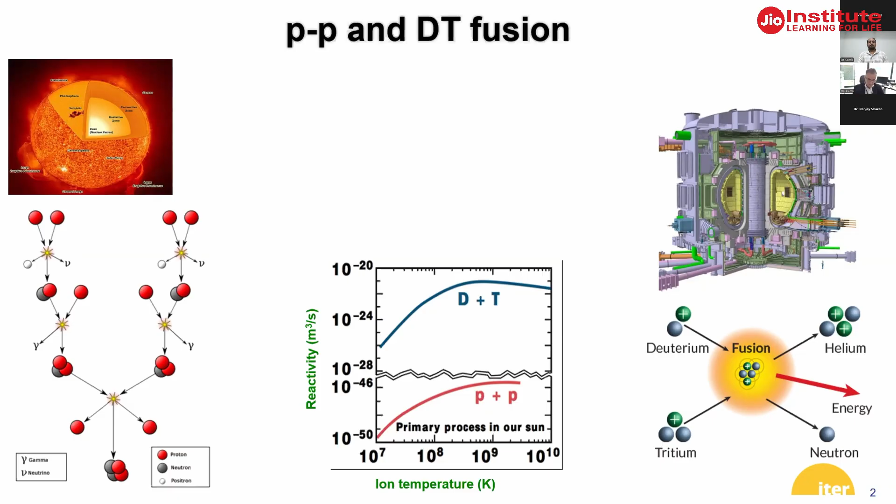So we use deuterium and tritium, which has a reactivity many orders of magnitude greater than proton-proton fusion. So we can have power densities which are significantly larger.

I wanted to share with you the power density question. The power density of, for example, a light water reactor fuel element is about 1 gigawatt per cubic meter. That's the order of magnitude. Of course, it's so small.

We can have small power sources with the coolant just a few millimeters away from the core of the power source. We have, say, megawatt per cubic meter in a normal burning curve, for example, and we'll have about the same order of magnitude in terms of power density in ITER. Now, megawatt per cubic meter is something we can manage.

But what is peculiar in fusion, different from what happens for example in a coal power plant, is that we cannot really embed the coolant in a matrix together with the power source. Cannot do that. The temperature conditions are very high, and the amount of mass we deal with is very small. Whichever way, one or the other, doesn't matter - we have to absorb the power at the edge.

Because DT fusion is so neutron rich, we end up having a big technological challenge associated exactly with that, with the neutron power flux. This has made ITER difficult, but it makes fusion difficult in general.

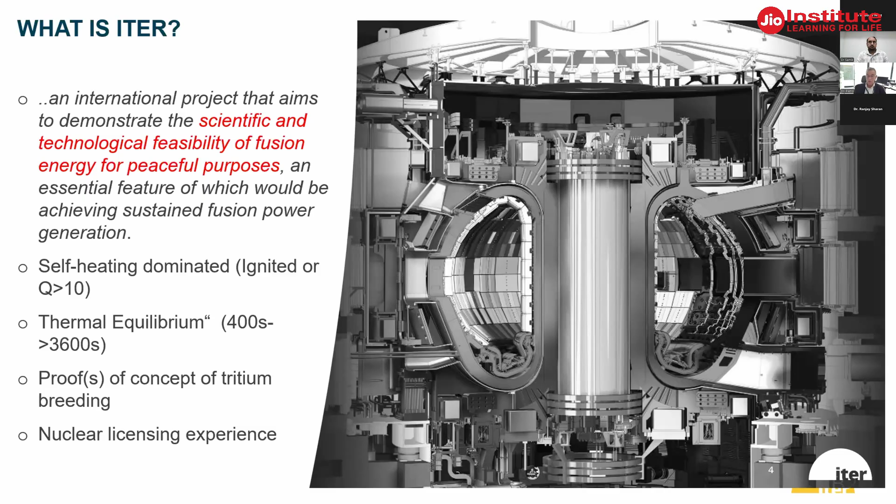ITER should also try to address the question of, at least in proof of concept, tritium breeding. We'll do so through the port plugs. It will provide a lot of know-how, including nuclear licensing experience.

In ITER, we will put about 1 gram of deuterium and tritium, which is more or less the amount of gas normally in the tire of a race bike. We put it in 1,000 cubic meters, so 1,000,000 times the volume, 1,000,000 times the temperature, and in fact the pressure is about the same. It will be about 10 bar in the core of ITER.

To reach that pressure, as you probably have studied in your course, we need very strong magnetic fields. The magnetic pressure we will have in ITER with its magnet is more than one order of magnitude above the kinetic pressure in the core of the plasma. That is really the essence of tokamaks, that this aspect ratio must have a beta of a few percent. So we need a lot of magnetic field in order to confine and stabilize the plasma with even a pressure of about 10 bar.

The project was developed in the 90s and then developed further in the early 2000s. When it came in the early 2000s, this is also when India joined the project, and so glad that you did. I hope that you will stay for the long run, as you are contributing tremendously to this project.

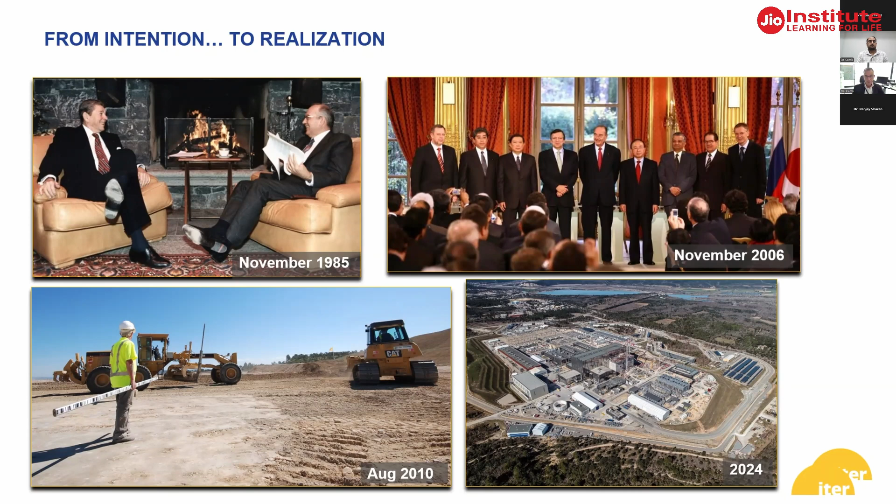This is when the project became more and more a political symbol, not just science research, not only energy research, but also a symbol of cooperation and science diplomacy, which, notwithstanding the fact that it introduces some difficulties, provides a lot of value to the project itself. I am personally quite proud that in ITER we have our 7 flags, and there are not many places in the world where we can show that scientists, engineers and people can work together with the same objective. This is a wonderful thing that I think ITER represents, and I want to recognize the tremendous contributions from India itself, which I'll talk about a little later.

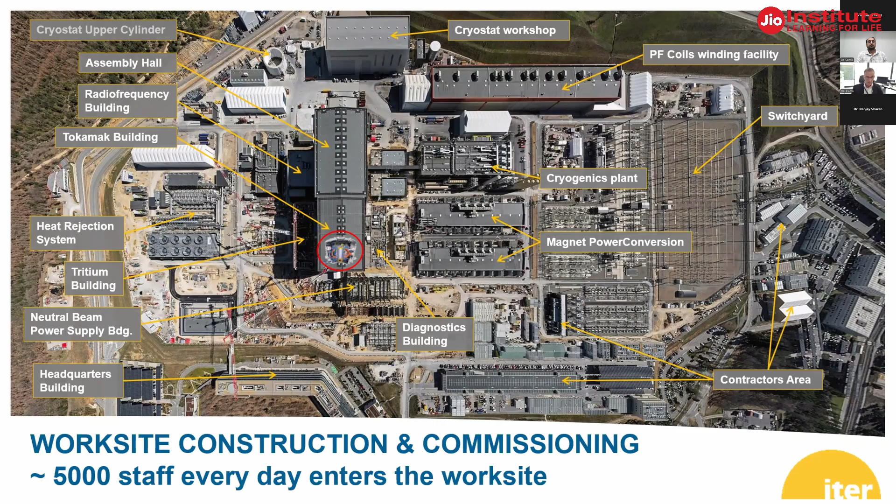If you look at ITER, you would see the aerial view of the project. On the right side, about a kilometer across, there is the switchyard, this is where the power comes in. Unfortunately it doesn't yet come out, but this is where the experiment will draw its energy. We have the cryogenic plant, actually one component where India contributed significantly. We have the magnet power conversion system, and then more towards the left, the tokamak building with assembly hall. Further left, the heat rejection and some buildings for the heating systems. On the lower side, where the headquarters building is, where the orange arrow points, this is exactly where I am at this very point in time.

In ITER, we have 18 toroidal field coils. The entire toroidal field magnet system will have an energy of about 41 gigajoules. Just for comparison, the Large Hadron Collider's entire magnetic energy is about 10 gigajoules, so it is an impressive amount of energy that the ITER magnet will have. It will operate at a field of about 11.8 Tesla at the conductor.

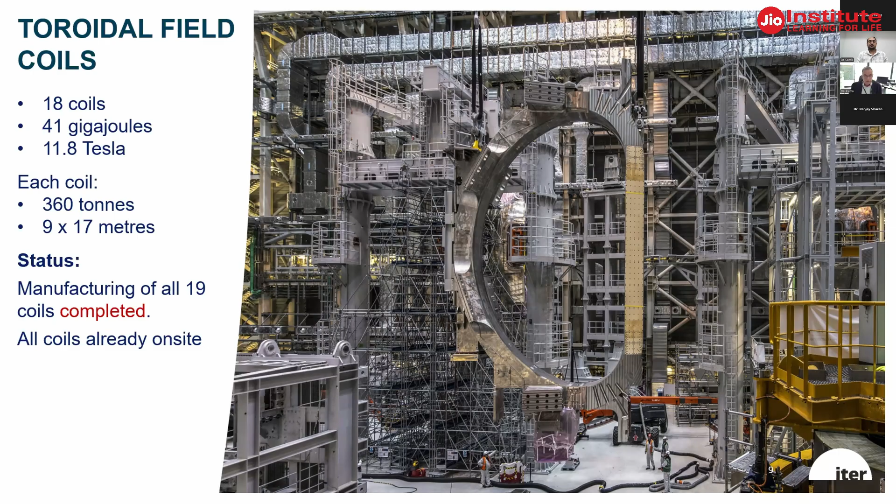It is really so. We have on site now all of the 18 coils. We actually have 19, as we have a spare one.

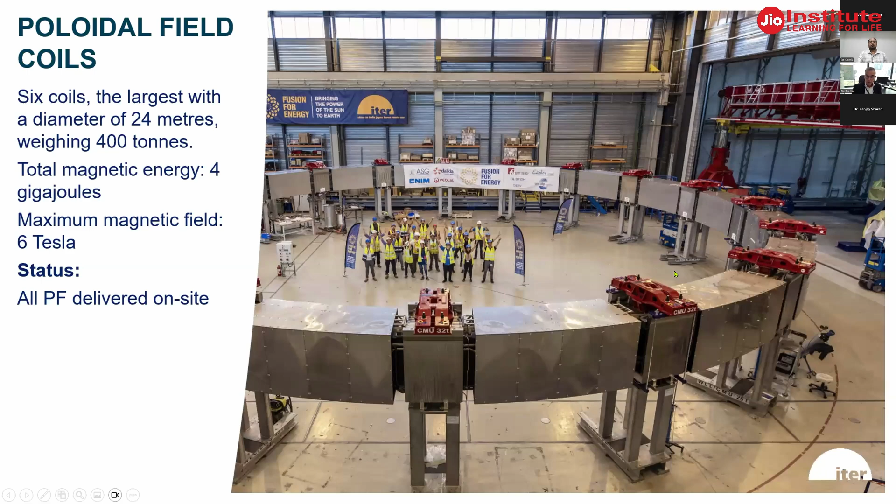Magnetic field here is less. Essentially, coils are made of niobium titanium in this case, while the TF coils operate at a higher field, and they are niobium-3-tin.

Then we have 9 sectors for the vacuum vessel. We got the 7th one here just today, and we have 2 more to go. They are one in Chieti in Italy, one in Westinghouse, also in the northeast of Italy. They are being finalized, and I was there last week just to encourage the team to deliver the vessel sectors.

Because they are essential for the assembly phase. So we have, as I repeat, 9 sectors of the vessel and 18 coils, meaning that each sector is pre-assembled with a thermal shield and the 2 TF coils before being lowered in the pit.

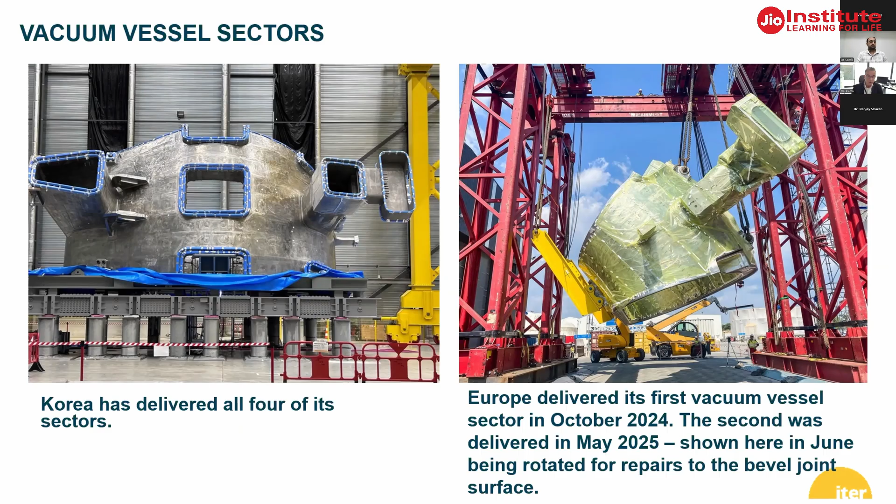Here you have an image in the assembly hall. On the right side, you see a vacuum vessel sector waiting to be put on the assembly frame. The pre-assembly frame is the one you see on the left side. And there you see another vacuum vessel sector.

If you look carefully, you will also see that around the vacuum vessel sector, the TF coils are assembled, with the thermal shield between them. We need the thermal shield between superconducting magnets and hot surfaces to limit the radiated power to 4 Kelvin. Otherwise, it would be impossible to cool and keep cold, and the magnet would be too expensive.

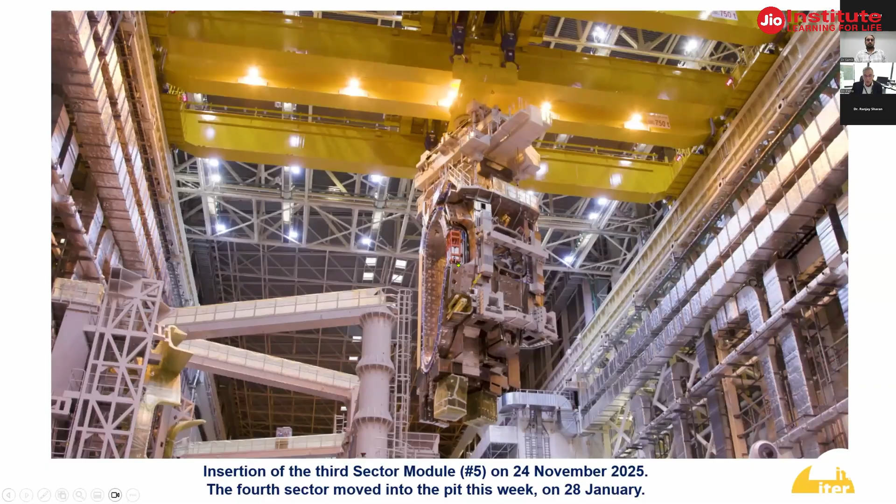I hope now you will be able to see an image here, which is the lift of the sector. It says the fourth sector moved into the pit this week, but in fact that was not this week - sorry, I didn't update this slide. This was the third sector being inserted, and I have a movie of that, which happened on the 24th of November.

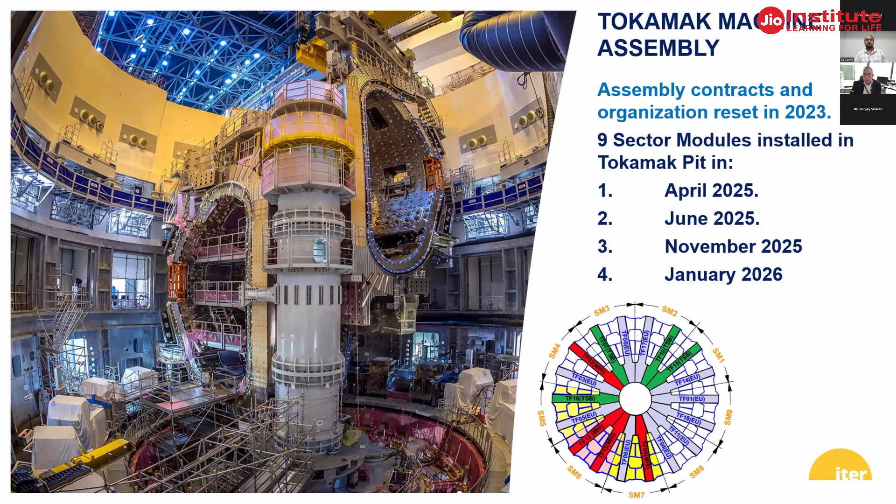On the 28th of January, we put the fourth sector in the pit, and soon we will put the fifth and then the sixth. So we are moving ahead. We have one more sector to be put in soon, but so far we had 4: one in April, one in June, one in November, and one in January. We are now putting sectors in the pit at the rate of about 4 every year.

And it has not always been like that, unfortunately, in ITER. Some of you that have worked in ITER know that there have been times where this was not proceeding as fast as it is now.

We have now, as I show you from the aerial view, a power conversion system. This converts electrical power coming from the grid to slowly modulated DC current to the magnet system. There are also power converters which operate at higher frequency, higher modulation, in order to control plasma position, control some of the coils, control events such as edge localized modes, or control the behavior of other minor types of magnet systems.

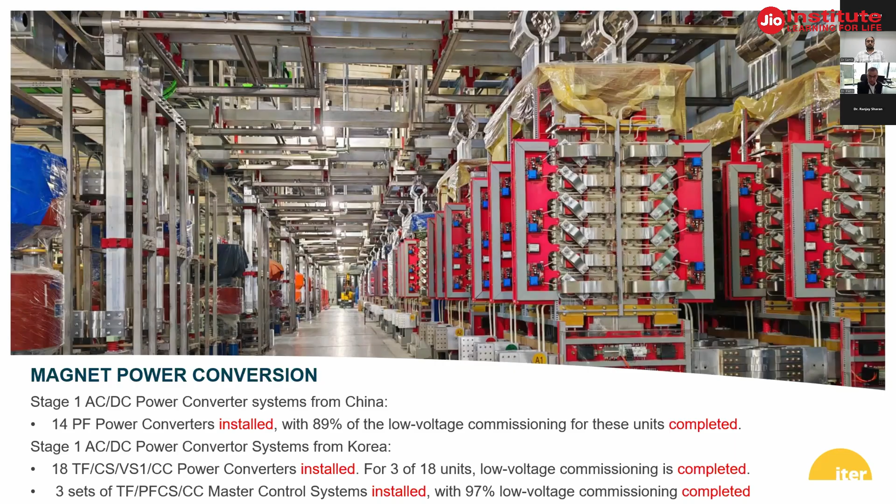On magnet power conversion, we have essentially all the stage 1 power converters installed, with commissioning essentially being completed. We have a very large cryogenic plant that has a refrigeration power of 75 kilowatts at 4.5 Kelvin.

Much of this power is to some extent conducted and radiated. Some of it is because of the AC losses in the conductor itself. There are many sources of heat to the magnet that have to be refrigerated through helium liquefaction.

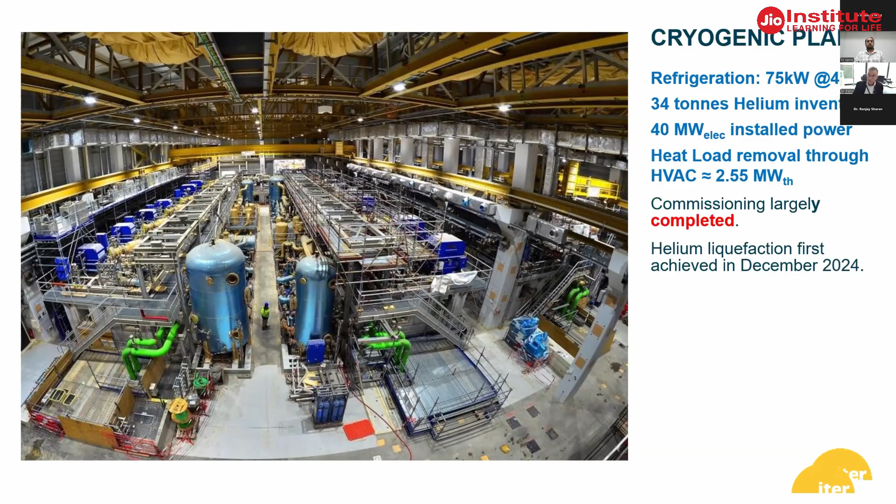The cryo plant and the cryo distribution is largely completed. Cryo distribution is still in the phases of completion, but a lot of work has already been done with a lot of input also from Indian companies. We achieved liquefaction in December of '24, and we are now using this cryo plant for a test facility.

This is the test facility. We decided 3 years ago to build, as a matter of urgency, a magnet test facility, and we have one now.

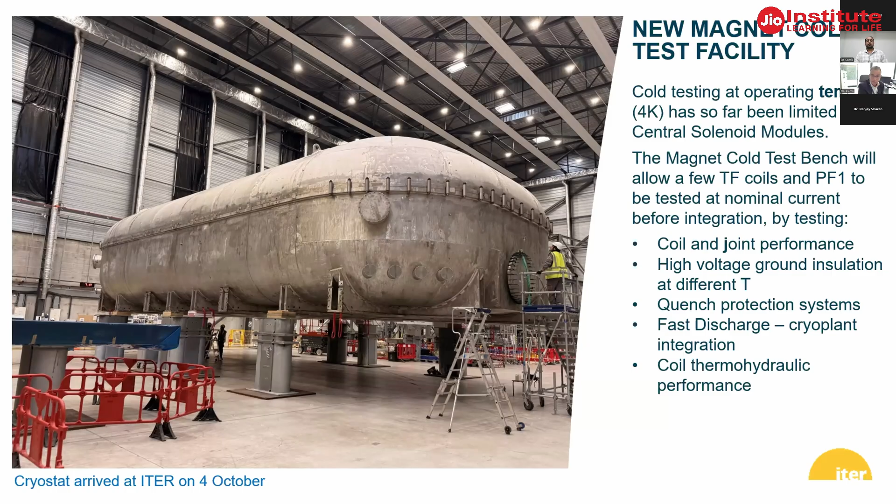We got the cryostat in October, and as I speak now, we have one magnet inside, and we are preparing ourselves for its testing. We will not be able to test all coils, unfortunately, as ideally I would have liked, but as a minimum we will test a few so we can see if there are issues that we can correct. This will provide a lot of know-how for the forthcoming commissioning phase and anticipate some potential issues.

So myself, I was working in the 90s, and I joined back the project three years ago. Maybe some of you could listen to my first talk at the Fusion Energy Conference in London. We had significant issues to deal with at the time, including thermal shield panels to be repaired and vacuum vessel sectors to be repaired.

At that point in time, end of 2022, we had one sector in the pit that took a lot of time to assemble, which we decided to pull out and repair. It was a very difficult moment for the project because we had underlying issues of quality and quality culture, and difficulties with the regulator who did not quite trust our quality control and quality culture.

We also had some assembly contracts that were not going at the speed we wanted. I mentioned that now we are able to pre-assemble and install four sectors per year. At the time, it took almost two years to install one. So it was a little bit too slow, let's put it this way.

We had to repair the components, develop a new baseline, and try to improve the project and design control processes. I'm glad to report that after two years plus of implementation of the new baseline, and all the work initiated in 2023, we have basically restructured massively the organization. I want to recognize that some of today's panelists have been at the core of this restructuring, in particular Arun and Barua, who contributed tremendously with ideas and actions to restructure the ITER project.

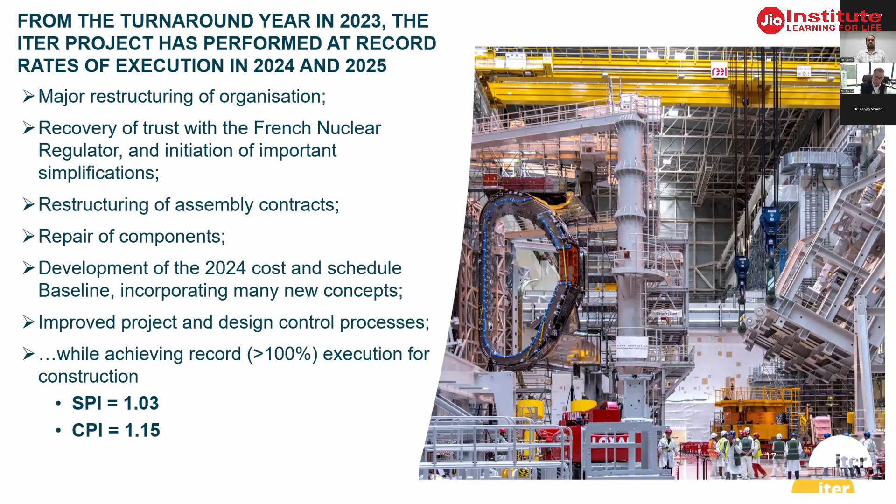But so many people have contributed. We now have, as of March 2025, an integrated schedule performance index for 2024 and 2025 of 1.03 - so more than two years above 1.03. Bear in mind this is almost a factor of two compared with what we had before.

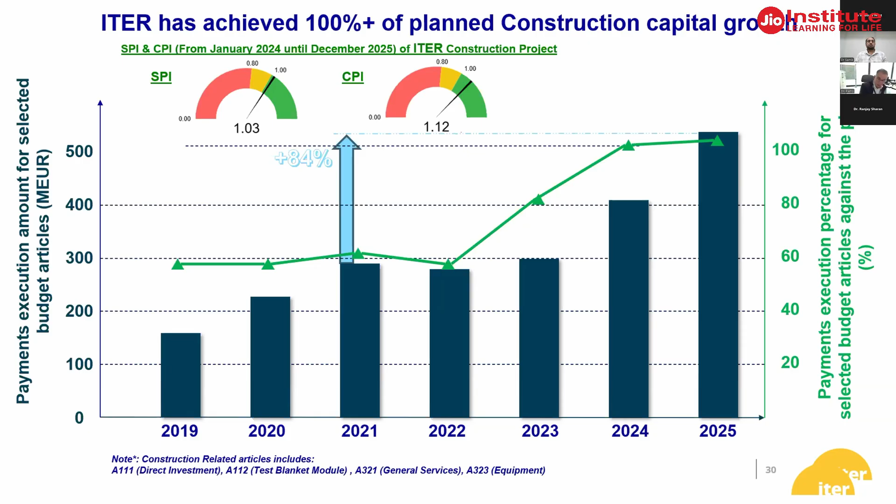This is data about plant construction capital growth. In 2025 we've implemented an SPI in excess of 1. We have implemented not only 100% of the planned work, but also 84% more work than ever before 2022. Actually this plot is conservative, because the cost performance index we have now is significantly higher as well. When it comes to actual earned value rather than payment execution, the difference is more striking. We are trying to prepare accurate information about this data.

Now I decided to give you a bit of perspective in the coming 15, 20 minutes about fusion, because I frequently get questions like 'oh my God, look at ITER, it's so beautiful, but so large, so complicated.' We should be conscious that this is not per se something we should do in the long run, but there are reasons for that.

We need to reach a certain type of performance that requires a certain triple product. In tokamaks, at the end of the day, the triple product is very closely related to the aspect ratio times the plasma current. For our aspect ratio, the plasma current we shall need is about 15 megamperes.

Important again is this question about thermal equilibrium, and also providing sufficient shielding to host a blanket. There have been, in the history of fusion research, some design proposals - I'll pick one here called BPX, designed in Princeton in the late 80s, early 90s. This was a burning plasma experiment designed to reach thermonuclear conditions, but not to have thermal equilibrium of the structure, not to have the shielding blanket, only to focus on a transient thermonuclear plasma ignition.

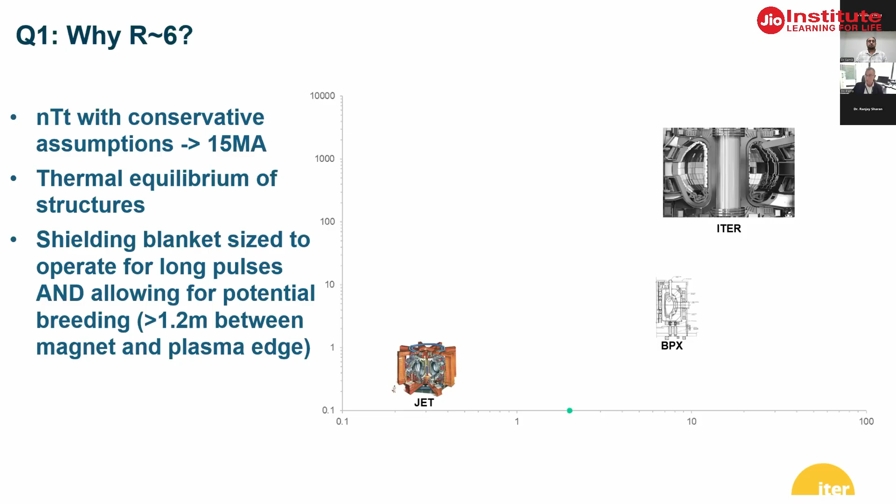Another driver is the size that's needed, the space that's needed potentially, not only to shield the magnet for the neutron flux, but to provide space if one would like at some point to utilize ITER also to demonstrate breeding at scale. This is something which in principle ITER could do at some point in time.

Another question I am asked frequently is: this was designed essentially in the 90s, the R&D was prepared in the 90s. It was, of course, very advanced and highly technological R&D done then. But what about if we would do it now? It has taken so long. Would we do it now? Could we do it faster, smaller, and whatnot? Well, here also I have to put some words of caution.

There are new technologies now that, no question, could facilitate this, and some of them we are actually able to implement in ITER itself. But I don't see any sort of silver bullet that would make fusion substantially cheaper and more compact.

Take into account that in these massive coils you have seen, in the cross-section, only 4% is niobium-3-tin. Only a small fraction of the conductor section you see there is niobium-3-tin. To a large extent, much of the space for the conductor itself is copper stabilizer, needed to hold on and resist a quench, and of course the helium needed to cool it.

But the bulk of the cross section of the TF coil is needed to resist the magnetic pressure. So it's like a pressure vessel. Almost 70% of the cross section in ITER is steel for the TF coils to resist mechanical loads. And the steel operates at a very high stress level at 4 Kelvin. It's very, very hard, and I am not aware of any other material we've developed recently able to operate at an even harder stress level with such thick and large forgings. So we are still, in my opinion, in ITER, at the state-of-the-art level.

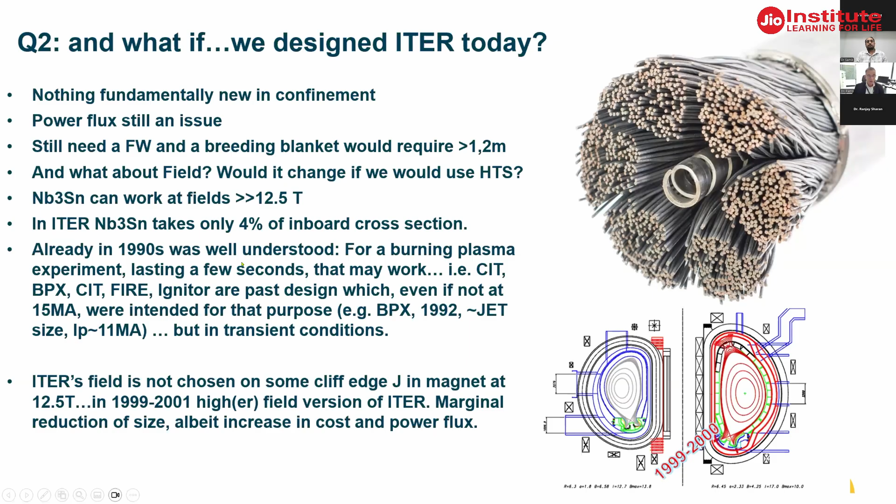I should nevertheless grant that there are important technologies that will be helpful in the future. High temperature superconductor, for example, in my opinion will provide means to reduce the cost. I'm not so sure about the size, but the cost for sure. They can operate at higher temperature, they can significantly reduce the operating cost for the magnet, and they can potentially also be cheaper than niobium-3-tin and the technology associated with that.

So a word of encouragement: ITER remains, notwithstanding the delays of the project, a modern machine. But the question that remains, for those of you who want to entertain a life of research in fusion, is for me more important: it's about the cost. There is no question for me as an engineer that we have to tackle the question of cost very seriously. ITER has been too expensive. It was more expensive than planned, and it has ended up so far too expensive. I have no doubt whatsoever.

Part of this cost, one could say, has something to do with the organizational complexity and some political compromises that have been made. Let's say this was a cost not for the benefit of the research infrastructure itself, but had other benefits, so it was not just wasted money. But we also have to learn about some technical complexity we introduced in this project. Part of it is because it is a research infrastructure, and part of it is that maybe we did not manage requirements very well, and also the fact that many things have been done as a first of a kind.

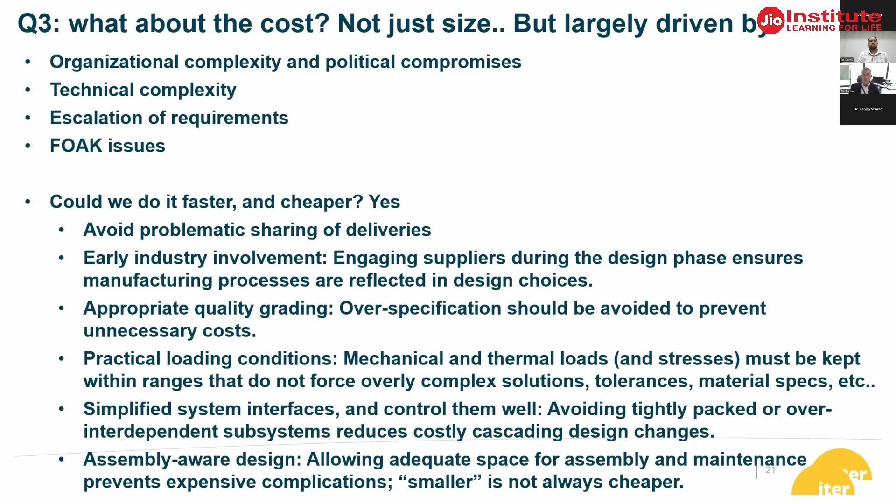I should also spend a few words about dispelling the idea that ITER, when it will operate, will essentially be proving the technology in all its complexities. It's not so. We need to be frank and transparent with our stakeholders and with ourselves, and we have to be grounded to understand what are the fundamental challenges.

I put the cost as the first bullet. I have spoken enough about that, but I think we should always put it as a very important driver. We have to deal with this question about the peaking factor for the heat flux, and research should be devoted to smoothing and spreading the heat flux. There is research in the divertor, research in the plasma mantle, but from my standpoint, notwithstanding many years of attention, this has not yet been fully resolved.

We have an important line of research on materials. We have an important line of research on blanket technology to find ways to breed tritium. As of today, I'm not aware of a design that would be compatible even with the ITER conditions, let alone more compacted designs. It is a complex area of research where many are strongly engaged, and that will have to be sorted out.

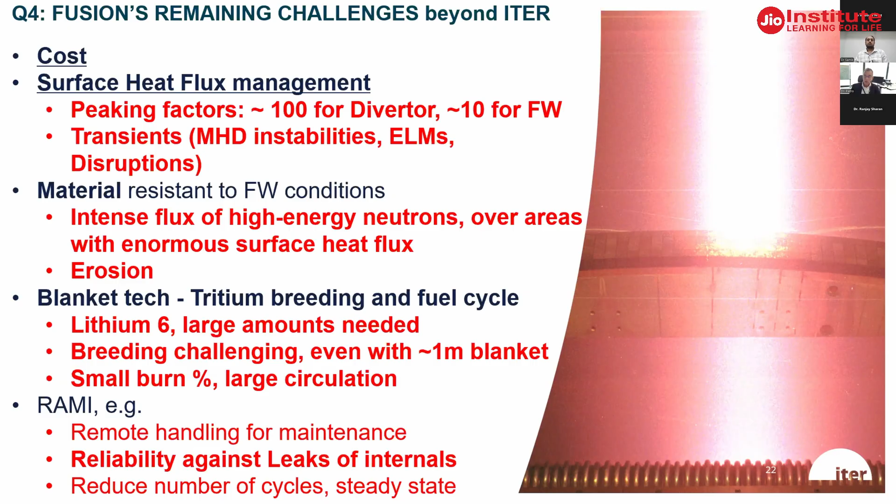And then we have another line which again points to complexity, or better, points in the direction of simplification, which is to find ways to increase reliability. I don't want to discourage anyone. On the contrary, I think we want to make these things work, but it is by being aware of the difficulties that we can then tackle and solve problems.

I want to say that in this process of evolution of the ITER project, we are also trying hard to make ITER more appealing for postgraduates and graduate students, and for those who will finish their master's, like you, and then want to move directly into the work environment.

Our ambition is that, for some time, ITER has been a place where people like me with a lot of experience would come, and we would sort of die here. It's a sort of cemetery of the elephants. It's okay when it comes to experience, but a thriving project needs to mix experienced people with those who come and learn and bring new energy.

For me, it's so important that some of you who may come and work in ITER can later move back to India, to bring back all the knowledge you've acquired working at ITER, back to your nation and to the program that I hope India will develop more and more in the field of nuclear fusion. So speaking about India, what has India done for ITER?

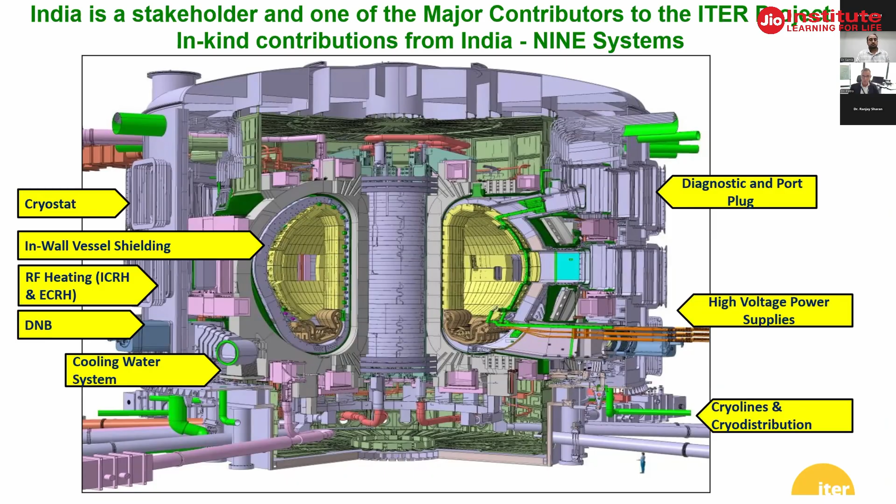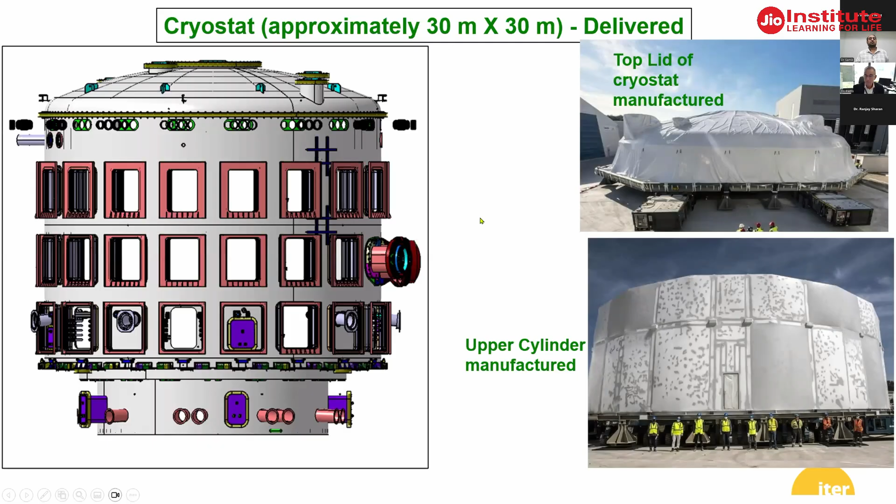It's a tremendous amount of work that has been done in India. I can only have a few minutes for this. Here is a view of the main components India has been responsible for in terms of in-kind contributions. The main one is the cryostat. I only have an image because there are so many photos of the cryostat in different parts. It's the largest cryostat ever built, manufactured by L&T in India, transported here, and assembled, because some parts could not be transported in their entirety. You see here some of the packed components waiting to be installed - the lower part and middle part of the cylinder are installed, but the upper part and the lid are still waiting to be installed.

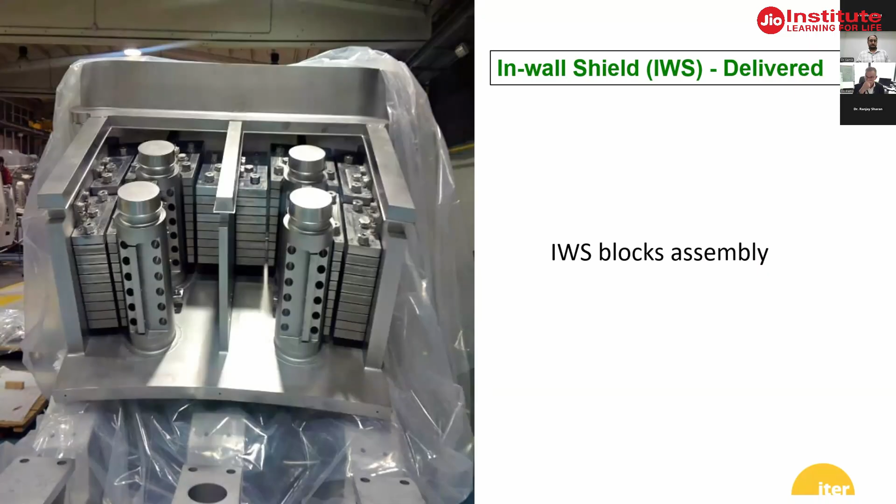We have all the torus cryopump housing, which have been delivered from India. A large, significant part of the in-wall shielding, essentially all of it, which is relatively complicated - parts of steel that have to be put inside the vacuum vessel to provide the right mixture of water and steel for the moderation and capture of neutrons in the vessel.

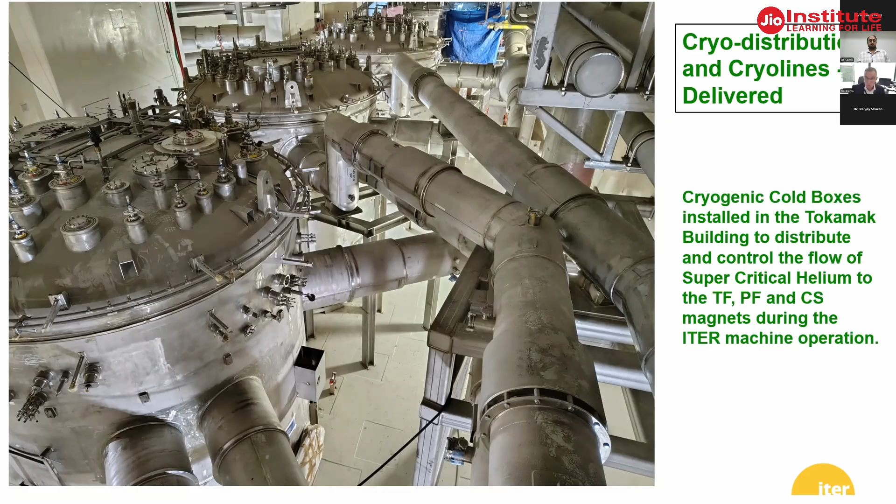In India, the cryo distribution and cryo lines have been built, along with cryogenic cold boxes. These are very, very complicated structures with complex engineering and complex conditions. What you see there, cryogenic lines, are not at all simple. They have to carry cryogenic helium with minimum heat losses, and be designed in a way that allows them to also be installed effectively. It's not easy at all.

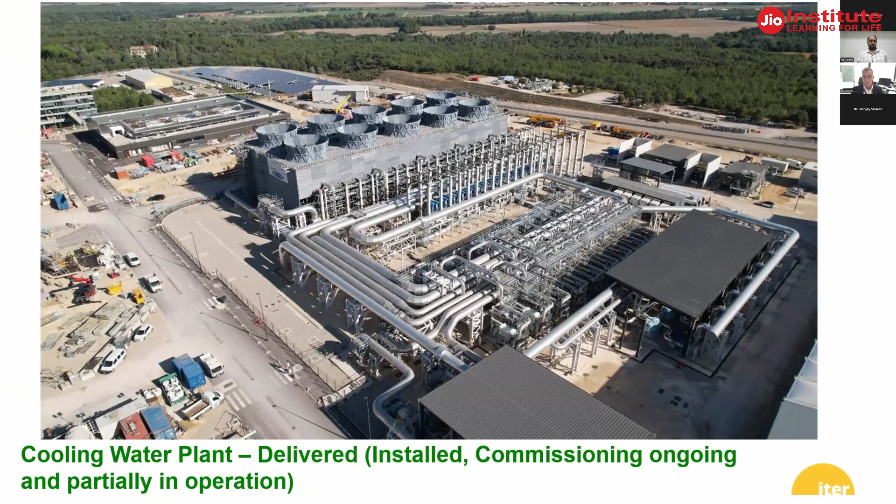So tremendous contribution in the cryogenic system, tremendous contribution on the cooling water plant, which was also delivered and installed, and commissioning is essentially still ongoing in some parts, but other parts of the system are already working.

I should also mention the key industries that participated in ITER: L&T Construction and Heavy Engineering, Inox, Tata Consulting Services and Engineers, L&T Technology and Vacuum Technique, and many, many others. If you come here, you'll see a beautiful panel with all the companies in India that have contributed to ITER. For those of you working there, let me express my deep gratitude.

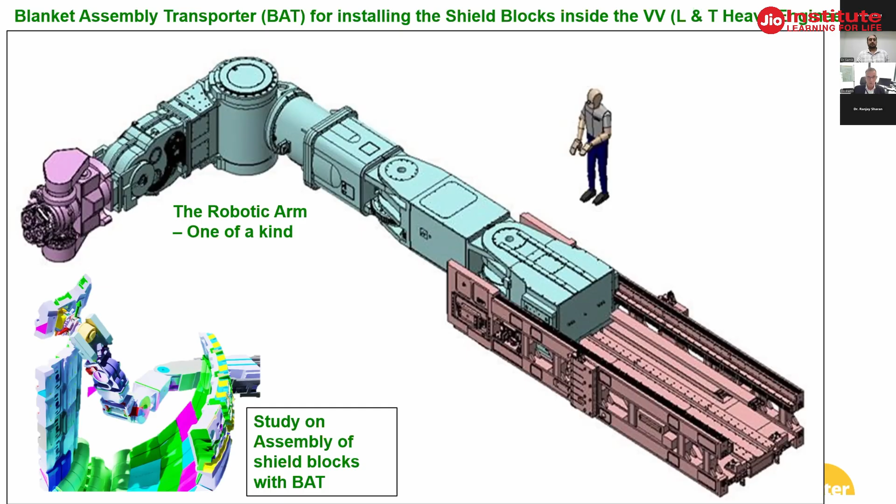We also have some direct contracts from the ITER organization with suppliers. We have a very big contract, for example, with L&T Heavy Engineering, and I'm showing here a very advanced component being designed and built by L&T. This is the result of a decision I took a couple of years ago to change the approach with which we assemble the blanket, and develop a robotic arm - first of a kind - to assemble the blankets. Tremendous, beautiful component that I hope we will soon have here on site for tests.

In India, there was tremendous work done for the repair of the thermal shield, and I want to recognize this. As I said, three years ago or a bit more, when I came, we found some problems with the thermal shield - quality issues, some stress corrosion on the pipes - and Inox India was instrumental in quickly repairing all this thermal shield. The thermal shields were shipped back to India, the cooling pipes were removed, there was some machining around the cooling pipes, they were completely stripped of the silver coating, and then the work was redone. I want to recognize that if it hadn't been for Inox, we would not be where we are today, because they did the job very efficiently and very well.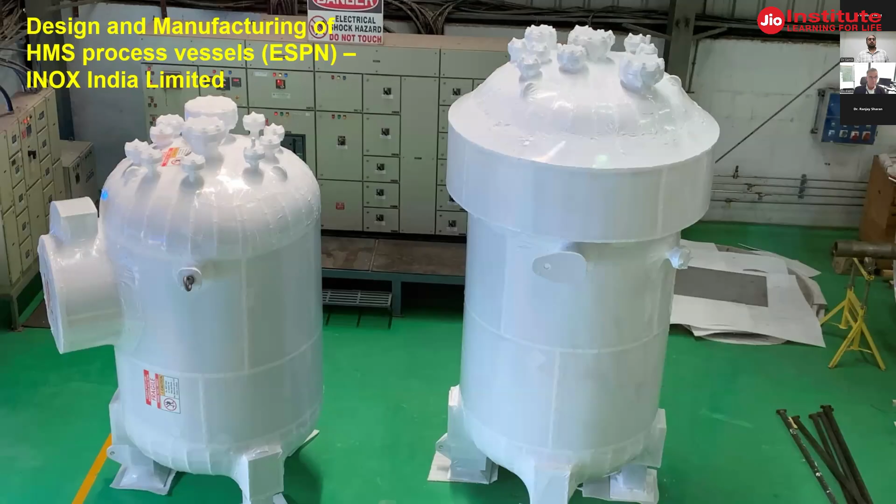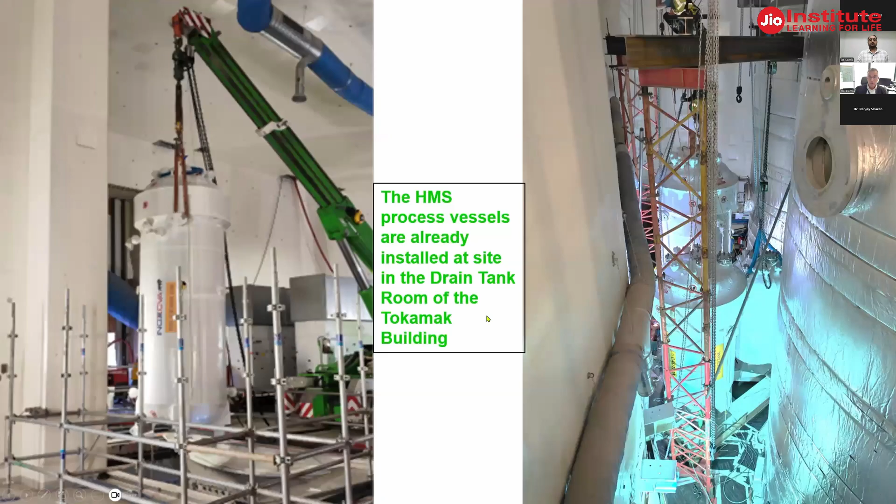There was also work on the HMS process vessel. HMS is not Her Majesty's Ship - it's the Hydrogen Mitigation System. It's a system to control the production and handling of hydrogen that could be produced during a potential in-vessel loss of coolant, where the coolant would impinge on hot components. This is something nuclear safety driven that was built, and these are not simple tanks - they are complicated systems, and installed.

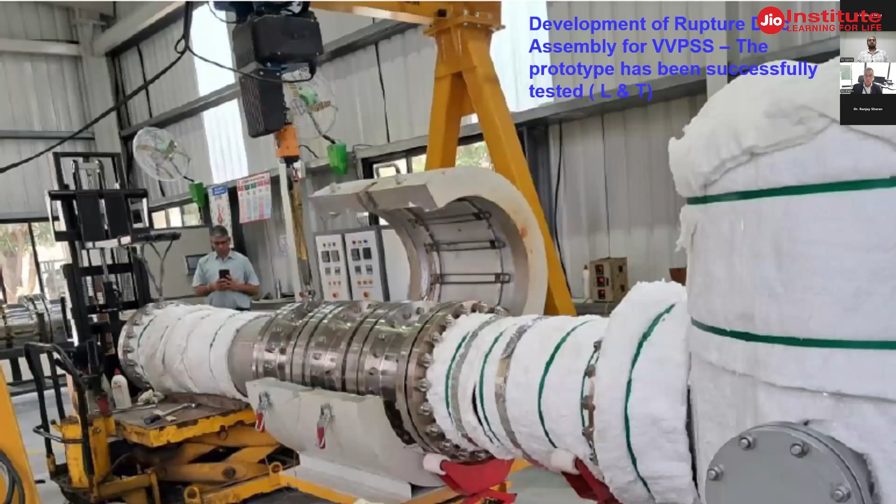Another very complicated system is the rupture disk system for the vacuum vessel pressure suppression system. Again, this is mostly dedicated to how we react to an in-vessel loss of coolant, and the development of the rupture disk assembly has been successfully tested.

And finally, I should mention that a little bit more than a year ago, we had here the visit of your Prime Minister together with President Macron.

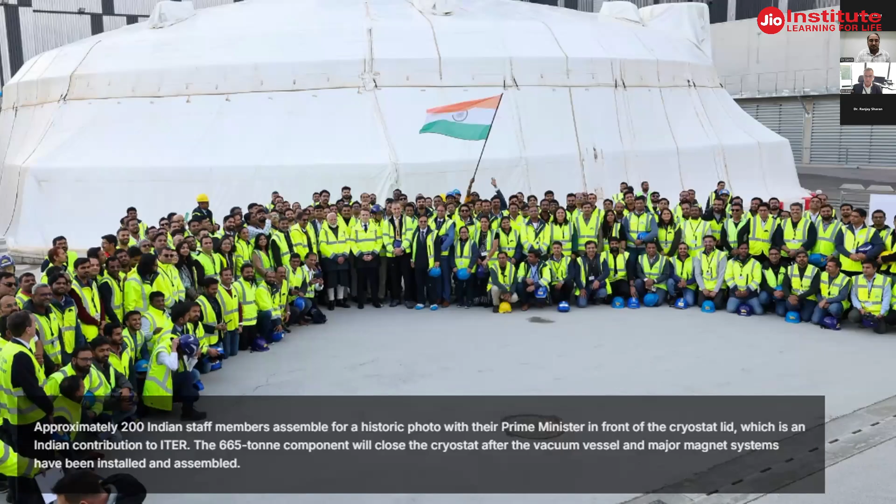There is this beautiful picture I want to share with you of Prime Minister Modi, President Macron, and myself—just myself and Macron, non-Indians—along with all the Indian team that works on the ITER team. The people from India were of course very moved by the fact that your Prime Minister came and visited and gave us a lot of words of encouragement.

And in the background, you see this huge disk. This is not a UFO. This is the lid of the cryostat that we hope to install, say, in a few years from now, when we will have finished the assembly.

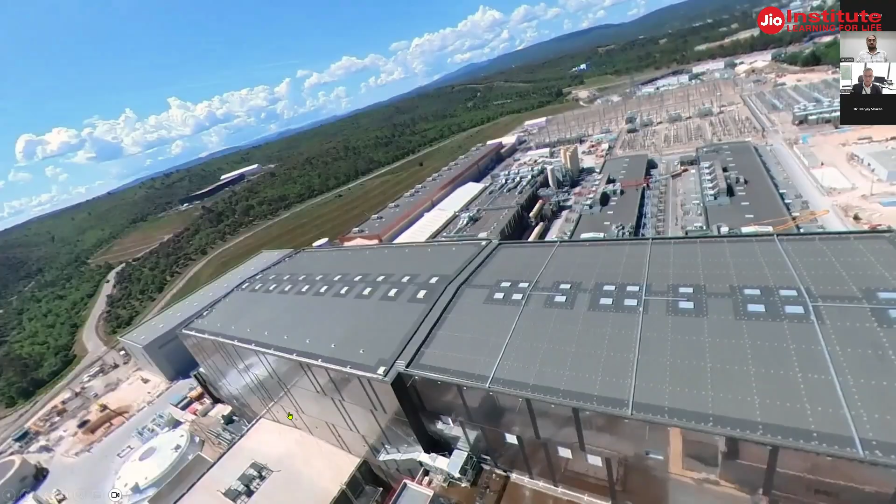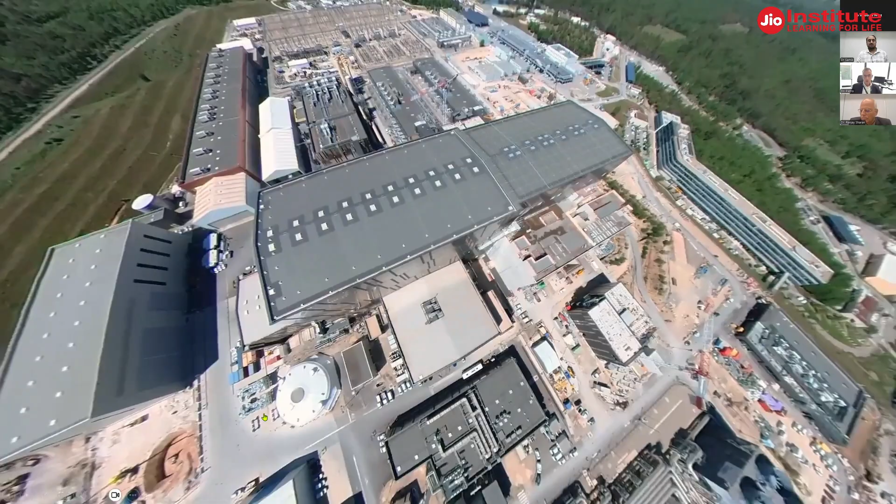So I'll stop my talk here. I have a movie, and I will share these view graphs with you so you can also use them. There is an overall movie that shows the site and, let's see if I can move a little bit ahead, it will also show the assembly hall, etc. So I'll stop talking here, and while the movie plays, I don't know if there are some questions that you plan to ask. I'll be glad to respond to anything I'm able to.

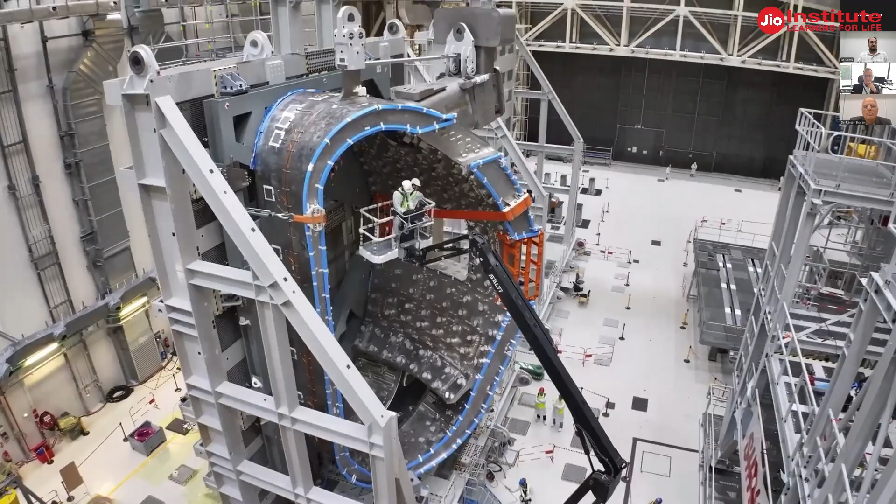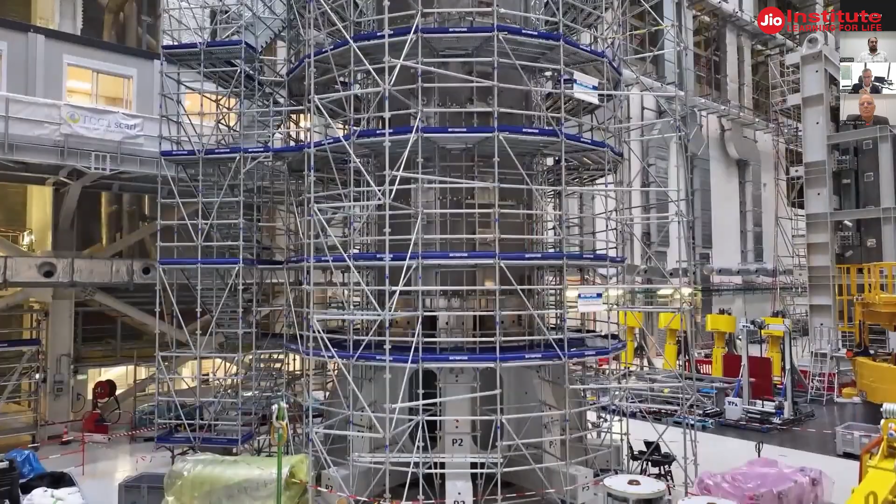Thank you very much, Dr. Barabaschi, for that very insightful and inspiring lecture. It is simply fascinating to hear about the progress of ITER and the scale of the engineering challenges involved in such a project of such magnitude. So I'd like to first open the floor to our esteemed panelists, if you want to share your reflections, or if you have any comments or specific questions for our speaker, Dr. Barabaschi.

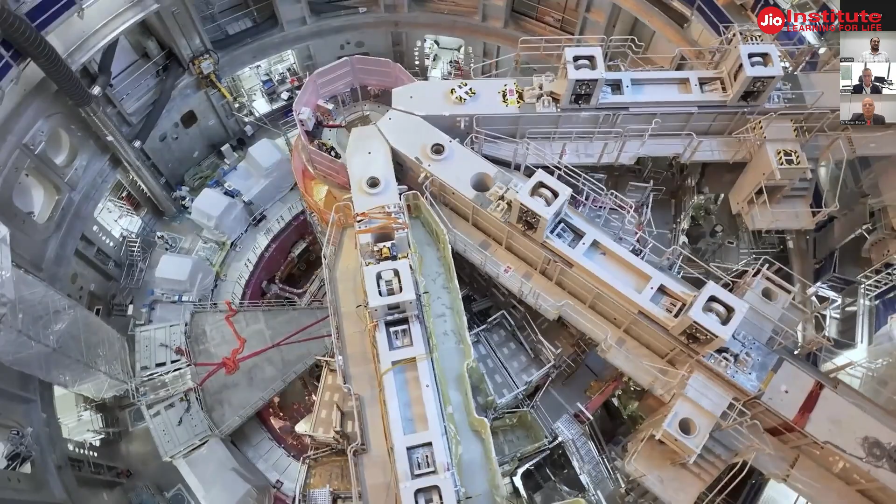So panelists, yes. I am very much thankful to Dr. Barabaschi. You have given a comprehensive coverage of the progress of the ITER project. I'm happy that not only in the Tokamak building, but in many buildings a lot of progress has taken place, and many systems have come into the commissioning phase. One important thing I'm finding is that you have started the nuclear licensing process, and with that process you have achieved such grand progress that is really fantastic. You are also taking care of the maintenance aspect, which is very important for this program. So on a first-of-a-kind system, such marvelous progress is really commendable. I salute you, and I hope this progress trend will continue and the entire world will support you. Thank you very much.

Thank you for the encouraging words, and let me thank, if I may, the tremendous support and endurance of all, and I should mention especially the Indian government, the Indian DA, and the Department of Atomic Energy. ITER has had, in the past, some rough reflections—I cannot say this project has always been very smooth. There have been very rough times, but it was remarkable to me that India has always been very strong and very supportive, and reflections are important too; through reflections we also improve. This question of licensing is of essence for us, the work leading to licensing, but also the fact that recently, through improvement in our relationship with ASN, we have been able, and we are in the process of being able, to make some important simplifications. We are very close to some important news that unfortunately I cannot share today, but that will allow us to reduce costs also. We made clear to ASN that in some areas the complexity was too high, and we found a regulator ready to discuss with us and find solutions to make things fit for purpose. But thank you very much for your encouraging words.